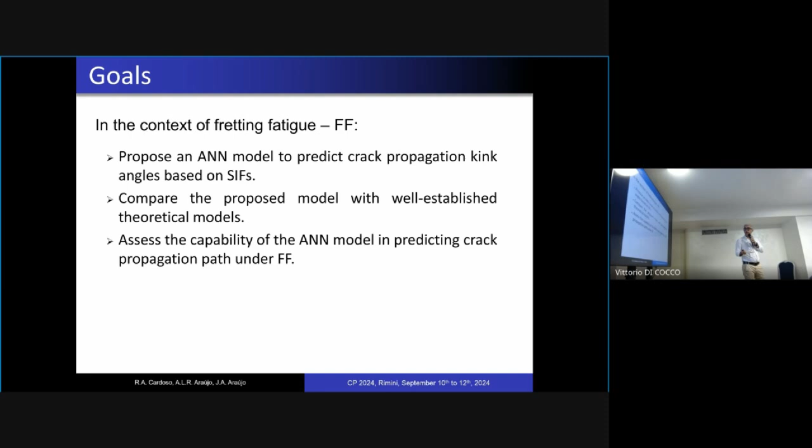Well, then we are going to compare this model with some well-established theoretical models available in the literature for this type of predictions. And then, as I said, we will compare the whole propagation path of the crack with some experiments, okay? My colleagues have already introduced the topic, so I will not be long here.

Fretting is a quite complex problem. This is what we say is the Disneyland of fretting fatigue. You have fretting fatigue all over the place here, a number of components in contact, at least 50 or more joints inside the turbine experiencing fretting fatigue, right?

The problem is quite complicated because you have stress concentration, stress gradient, multiaxial non-proportional stress states, some level of damage at the surface caused by fretting wear, early crack nucleation, and sometimes microplasticity. So all types of problems that we know from solid mechanics. So it's a quite complicated problem, with a lot of applications in industry, mainly the aircraft industry.

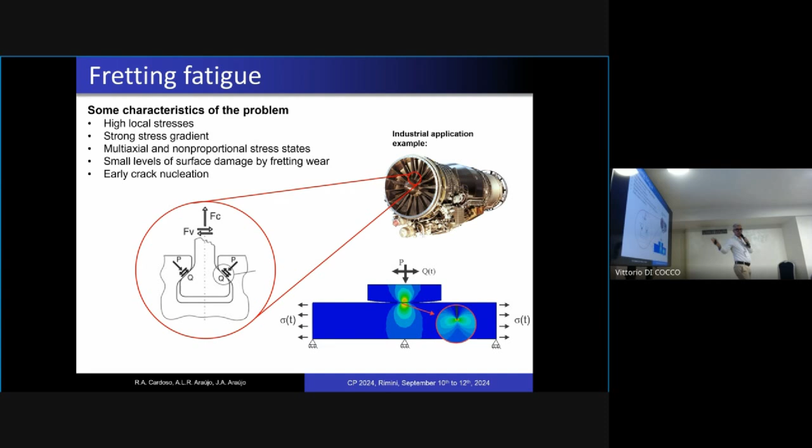So the next 2 or 3 slides are the most important ones to understand the presentation, okay? The other ones you can sleep through, but for these ones, please keep awake, right? So what we want to do here, what's the main idea?

I want to estimate this angle, the kink angle, at a certain stage of the crack. Every time the crack changes direction, I want to be able to estimate this kink angle, okay? And I will do that based on K1 and K2, the mode I and mode II stress intensity factors. So that's the idea. And I will use an artificial neural network to model that. The whole presentation focuses on this idea, right?

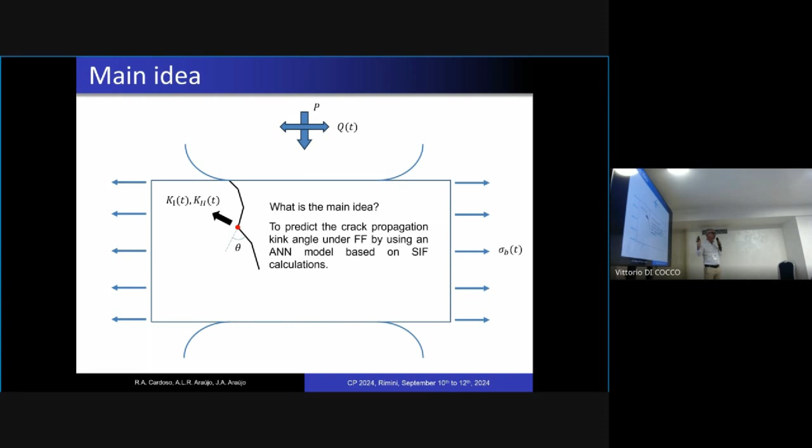This is the classical artificial neural network model. So we have 3 layers: input layer, hidden layer, and the output layer, which is the kink crack propagation angle that I'm looking for.

Well, we talked a little bit during lunchtime. The problem with artificial neural networks is that people who do not have solid knowledge about solid mechanics start putting anything in here as input variables, okay? So the model becomes very strict. It works only for that thing, and that's not the idea when you want to use an artificial neural network.

So it's good that you have a good mechanical feeling of what should be controlling, in this case, the crack direction, in order to choose the proper input variables, okay? So in our case, don't be too worried about this. This is a classical sort of structure. You find this in MATLAB basic tools, so it's ready. You don't need to work too much here, but you need to know what you want to give as input variables, in order to make it sensible and mechanically consistent.

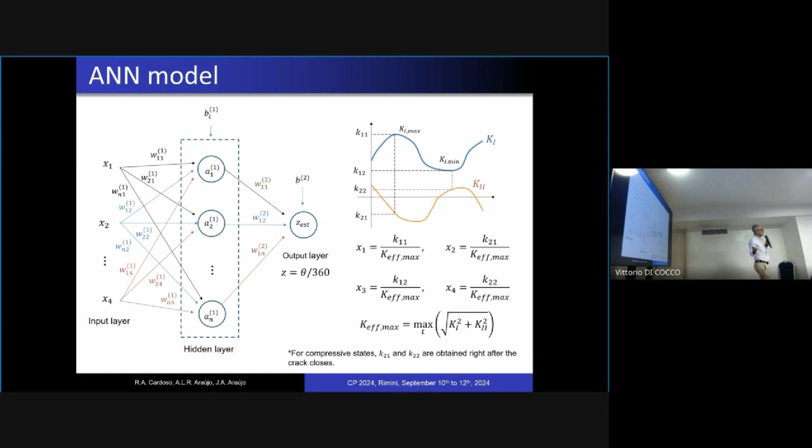These are the classical models that are available in the literature, okay? So we are going to work with the maximum tangential stress. In the maximum tangential stress, consider a material point ahead of the crack tip, and you want to find the angle where the sigma theta stress is maximum in time. So you are maximizing according to the material plane and also in time. This is the hypothesis adopted by the maximum tangential stress.

We are also using the maximum tangential strain range that was proposed by our research team in Brasilia. Pinto was my PhD student, also supervised by Hazard. It was a joint work, a co-tutored work with the student.

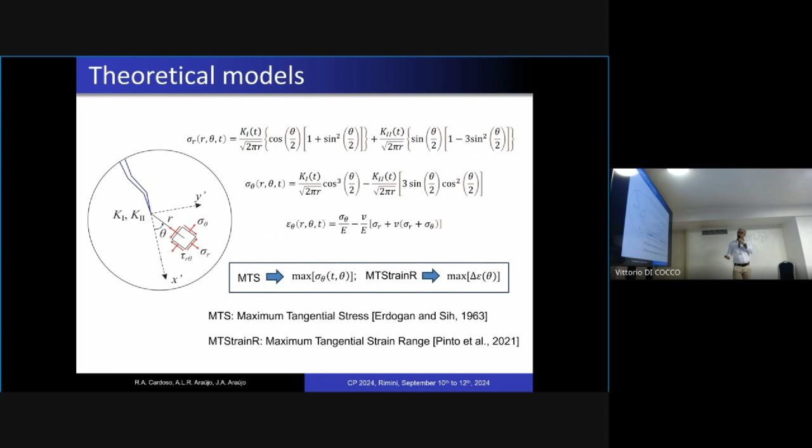And in this case, we say that the crack will propagate from this point onwards at the theta angle where the range of the normal strain is maximized. So as we are talking about range, the time doesn't matter anymore, only the plane. So I maximize over the plane where delta epsilon will be maximum. Okay, so those are the theoretical models.

This is another important slide. This is how I'm going to feed the ANN, right? I need an experiment, and in the experiment I will get the dominant crack. Let me take one point here as an example where you can clearly see a kink of the crack.

At this point, I will measure the X and Y position of this point, and I will build a finite element simulation to compute K1 and K2, right? I can measure this angle. So all my input variables are now given by this test.

This is a single fretting test carried out by Almeida, a previous PhD student of ours, doing fretting wear tests. I don't have the remote fatigue load, but I have all the contact loads there in aluminum 7050. So if I repeat this for the other points, I keep capturing data to feed my artificial neural network.

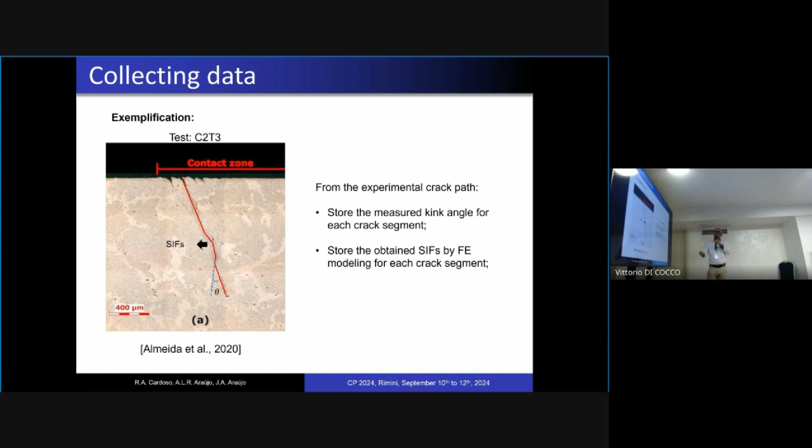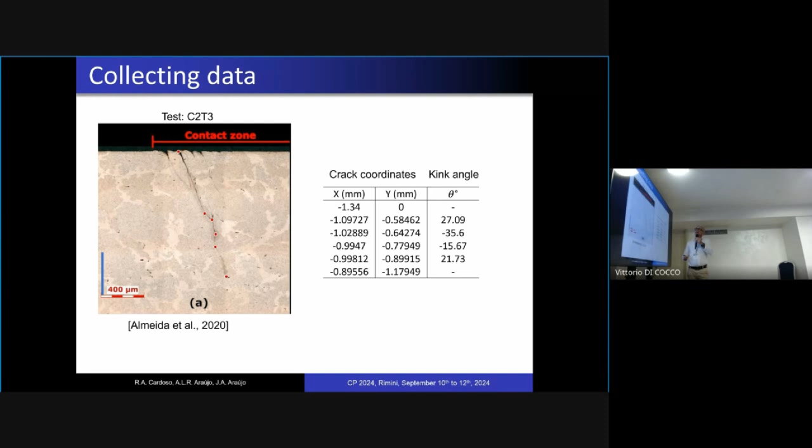So if I keep doing that, 1, 2, 3, 4, for this test I could capture 4 data points as input data for my ANN. And then, finite element modeling, typical, right?

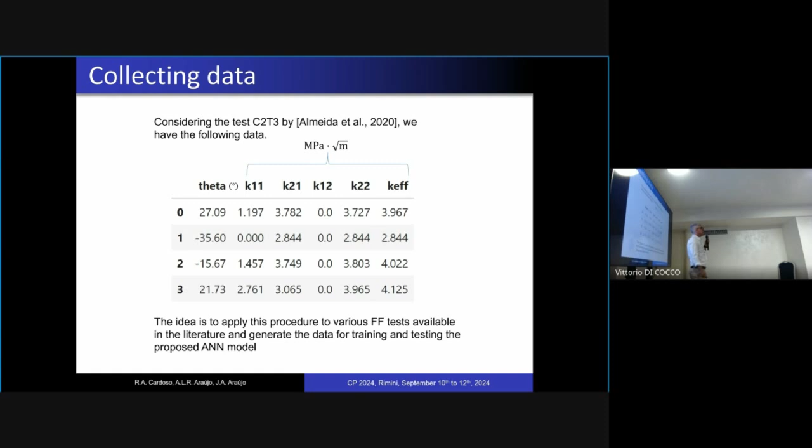Then, after the finite element modeling, I have the theta from the experiments, K1 and K2 from the finite element, and then I can compute all my input variables, okay? And now I will do that for all these materials available in the literature, right? If I consider all of these where we could carry out these measurements, we will have 175 data sets. We separated 150 for training and validation, and 25 for testing, right?

This word sometimes is misunderstood by the people who are working with ANN. We understand validation, in our case, as the data used to prove that your theory is correct. Here it is not. The validation here is some data, usually 10 to 20% of the training data, that you separate just to avoid the network being overfitted, right? But not to prove it's correct. To prove it's correct, you are going to use the 25 testing data. These 25, the artificial neural network never saw. It was trained without considering this data, okay?

So now results. I know my time is over. Nearly over. I gave you 2 minutes more. No,

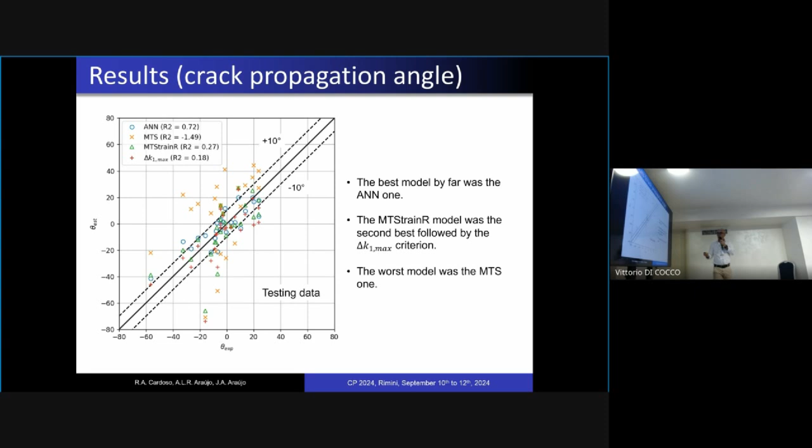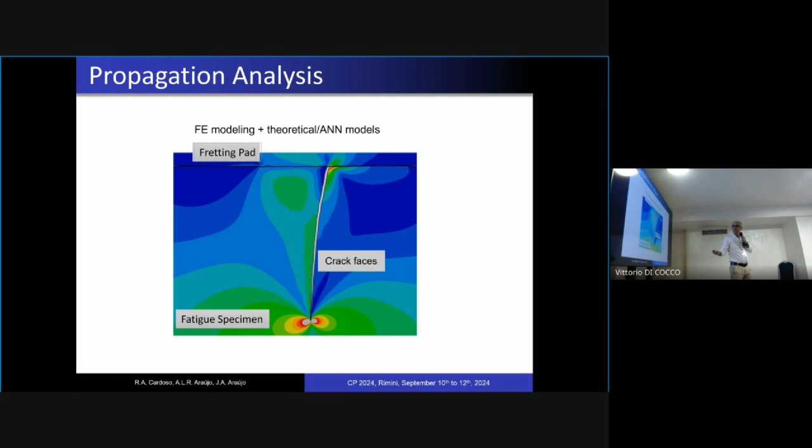Then we simulated the crack propagation using this, step by step. And here's the final result, and then I move directly to my conclusions. You can see that for the data from Almeida with aluminum 7050, this is the real path, the experimental path of the crack, this is X and Y, okay? To get the direction of the crack. And you can see that the ANN is the orange one, okay? Behaves quite well. There are some analytical models here that also look reasonable, but they are less stable. You see that they keep doing some strange paths here, and the ANN is more following the general path of the whole crack.

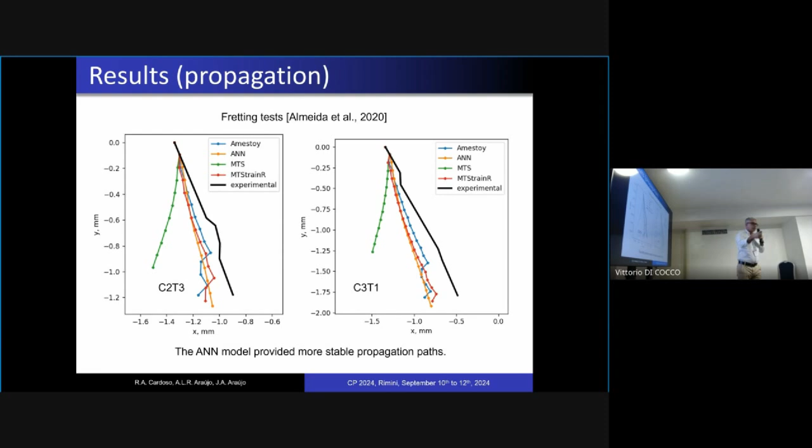Okay, let me show you. Forget Amestoy. Okay, it's another model that we used as well, but time was not enough to talk about it.

Here we have also data for Pannemaecker, a colleague who works in France, and here again you can see that the ANN follows quite well. In here, she worked with a bulk fatigue load, which Almeida did not, and the crack was always open here. It's a positive ratio, okay? In the other test, we have the contact mechanic loads, but you didn't have bulk fatigue load, right? So we believe that case was a bit more complicated because the crack faces were always touching each other as well. And the conclusions, right?

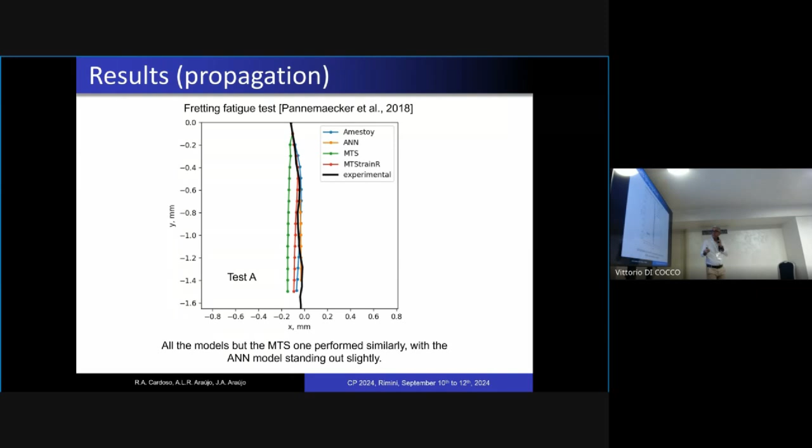So, in terms of the capability of predicting cracking angles, they provide better results than the theoretical models. In terms of the whole propagation, the ANN model was better than the classical models when high compressive loads associated to the fretting phenomenon were present. But for situations where the crack remains most of the time open, the ANN and the strain range model provide comparable results, okay?

And of course, we did this, as you saw, for a range of aluminum alloys. We need to see if it works for different materials as well, because as I said, the advantage of the ANN is if it can be generalized for other situations and other materials, okay? Otherwise, it makes sense to work with classical models. You need less data, less material constants and so on.